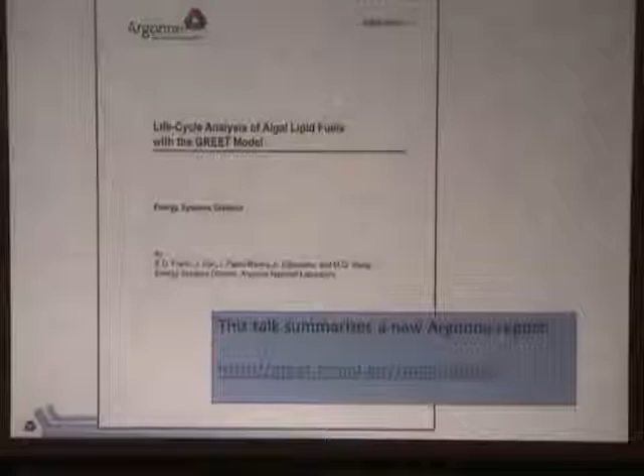I'm going to be summarizing a report that we put out a couple of weeks ago. So if you're interested in more details, you can download it from that address, or you could just Google for GREET publications, and that'll get you to the right area, and you can locate it there.

So let me start with motivation and background and approach. So there are various kinds of algae, macroalgae, seaweed, and microalgae, which are typically unicellular. You can find them in fresh water or salt water. There are many different kinds. Microalgae are nice in terms of growing biomass because their metabolism is focused on growth. There's no woody structure to them, no support structures that they need. And they grow in several different modes.

And the question is whether or not we can carry that over for producing biomass, with the idea being it would complement other kinds of crops, and it has the advantage of potentially having large productivities per unit of area. The fact that it's been grown before for nutraceuticals is somewhat encouraging. On the other hand, the value of nutraceuticals is so high compared to an energy crop that really you need new methods of cultivation. If you're producing something with such a small margin compared to, say, astaxanthin or one of the other nutrients, you have a much larger economic and technical challenge.

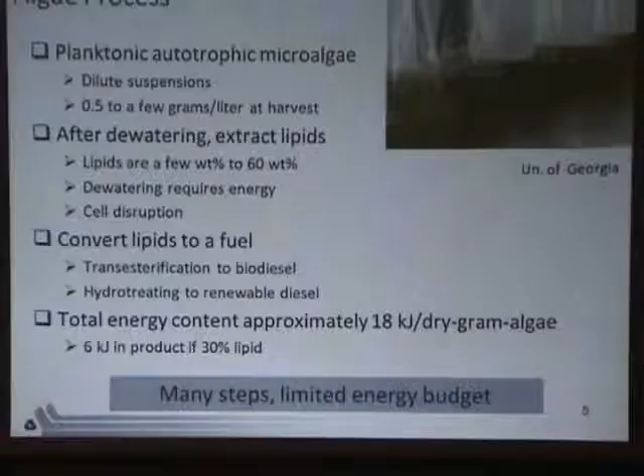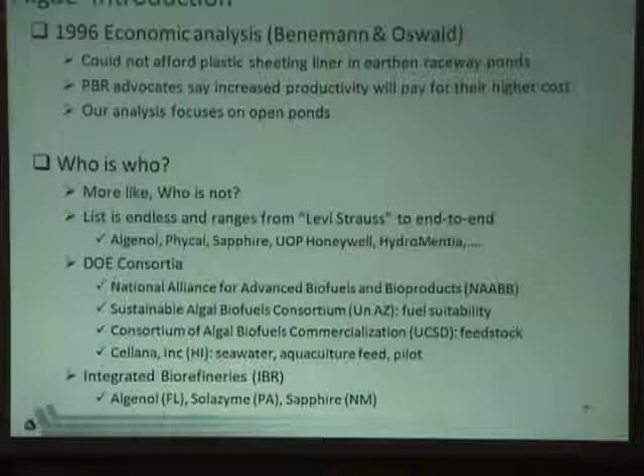So there have been some techno-economic analyses done in the past. Benemann and Oswald, for example, did a study in '96, and they concluded that even for the open pond case, you can't even afford to put the plastic liner in. You have to have the clay soil, or else it destroys the economics of the process. So you have two approaches, really. In one approach, the open pond approach, your strategy is keep costs as low as you can. In the PBR case, the strategy is we're going to make up for our extra cost by increasing productivity and by improving the reliability of the culture because it's a closed system.

I'm going to focus on open ponds in this analysis, partly because of the economic reason, partly because it's easier to find a consistent set of data describing the process for the open pond. So I'll be focusing on open ponds in this.

So who are the players right now in doing algae? Who's who? But the question may be who's not. Everybody's getting involved in this. And the list of people involved range from sort of the Levi Strauss companies whose business model is to sell equipment to the other businesses, most of whom will go out of business, and other companies, like let's say Sapphire, who are doing the entire process end to end. So you find all sorts of people involved, and you also find government involvement, projects funded by DOE.

NAABB is probably the largest one amongst the current DOE consortia, and then there are several others that are looking at a few particular focused issues like suitability, feedstocks, and so forth. And then there are a few integrated biorefinery projects with a few companies that have been sponsored to look at scaling up.

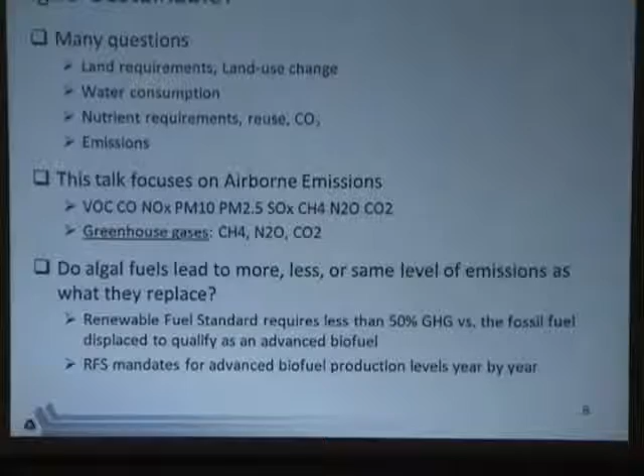So the question is, is it a sustainable approach? If we made this work, would it be a good thing? And there are many issues to consider. Land requirements, land use change associated with this, water consumption, nutrient requirements, where would you get the CO2, various kinds of emissions, eutrophication potential, and so forth. What I'm going to focus on today is talking about airborne emissions. In particular, I'm going to focus on greenhouse gas emissions, so emission of methane, nitrous oxide, and CO2. And the question is, do algal fuels lead to more or less emissions compared to the fuels that they replace? That's what we want to answer.

Ultimately, one of the things driving the process is the Renewable Fuel Standard, which defines an advanced biofuel in terms of its reduction in greenhouse gas emission relative to the fuel being replaced. To qualify, in this case, you would need to have a 50% reduction.

So there are various sources of emissions that you can consider. You can consider the direct emissions that occur during your process itself if you burn, let's say, natural gas in a boiler. There are also emissions upstream, so energy that you use to obtain feedstocks or to produce chemicals. In this case, let's say nutrients such as ammonia, urea, triple superphosphate. Energy used to transport materials. And then there are downstream emissions. For example, when I burn the fuel in an engine, and there are many different fuels that you might produce, different efficiencies for using them.

Life cycle analysis is one approach to answering this question of have we produced something sustainable, at least with regard to GHG emissions. And the approach then is to consider all these various emissions I just described within some systems boundary that maintains a fair basis of comparison between the two scenarios that you want to compare.

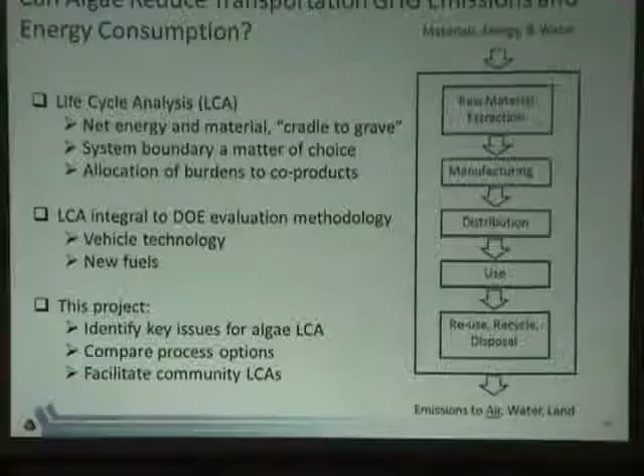And there are different ways to do it. And according to the way you choose, you'll get a different answer. And it's not necessarily right versus wrong. It's more of an issue of systematic uncertainty in the approach. Now, life cycle analysis has been integral to DOE's approach to developing new technologies and new fuels. And I'll mention on another slide how that ties in.

But in this project, what we wanted to do is we wanted to achieve these three things. We wanted to identify key issues affecting algae life cycle analysis. It's very early in the development stage for algae, so we want to understand what the key variables are. We want to compare the important process options. So in other words, exercise those key issues that we find and see how much the changes are. And we wanted to facilitate community life cycle analyses.

And what I'm referring to here is these systematic uncertainties I'm talking about with regard to system boundary and allocation methods. It makes it very challenging to compare what's in the literature right now. As people look at the different options for doing algae, you see a difference, but you don't know if it's actually fundamental to the process or it's just because of a difference in the way that they approached their analysis. And we want to find a way to facilitate making those comparisons.

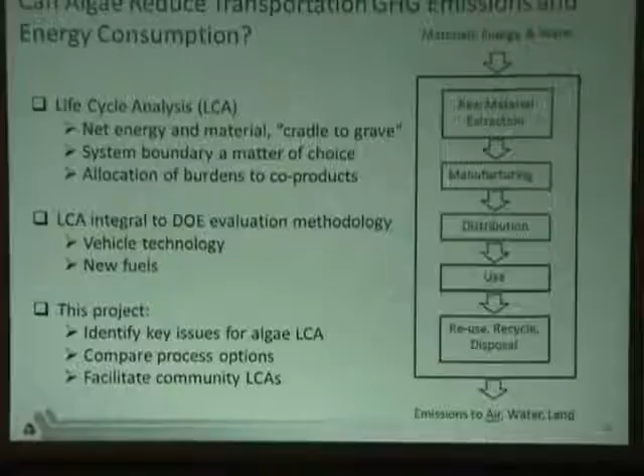So let me give a quick overview of the LCA work that's been done so far. There's been an explosion in the literature, so this is probably only a half to a third of it. But I wanted to highlight sort of the key ideas that have come up to set the context for the choices that we've made in our analysis.

So Kadam looked at a coal power plant that was co-fired with algae. And the algae was grown on CO2 from that coal power plant's emissions. And one of the conclusions that that study reached was that GHG reductions were possible, but if you did CO2 capture with monoethanolamine at the power plant, the steam required for regeneration then disturbs the energy balance sufficiently that you reduce greatly the benefits that you have. So that study led to the direction of let's just look at flue gas if that's going to be your CO2 source, and let's put aside looking at CO2 capture.

Campbell, though, then looked into the potential for doing this in Australia, and they found that 7 of the 9 power plants that were good candidates for constructing this didn't have sufficient land nearby to absorb the CO2 being produced. So they had to consider transport of the CO2, the flue gas, over further distances, and discovered that if you pressurize the flue gas, you use 30% of the energy in the algae. And this goes back to that energy budget at the beginning. So this leads us to the point of saying, well, we're going to look at low pressure transfer.

Lardon considered open ponds and doing hexane extraction, but didn't really go into detail in treating the residues that were left over. So you pull the lipids out, you still have a bunch of mass left. And he didn't go into detail of what happened there, but concluded that you have to avoid drying. If you simply dry, it takes too much of the energy to get dry enough before you go into a sort of dry process that you would use similar to soy.

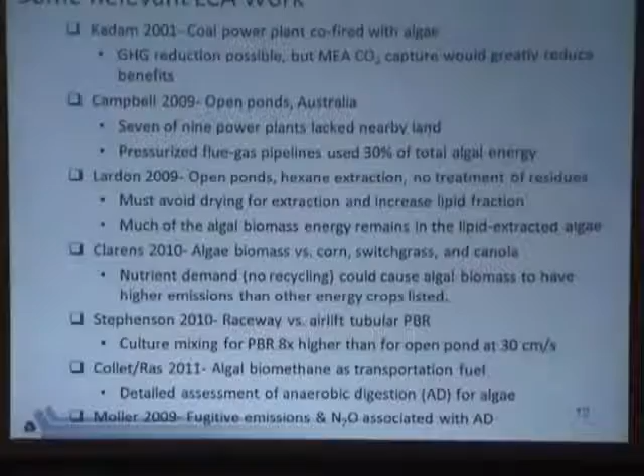Stephenson looked at raceway versus airlift tubular photobioreactors and pointed out the importance of considering the mixing energy just to maintain the culture, and found that the PBRs were 8-fold higher. Now, Stephenson's study was at 30 centimeters per second for mixing, and that's actually pretty high. If you look at some older studies, you don't need to be that high. It depends on the species that you look at, but the key thing is that the power consumption goes like the cube of the velocity. So that's a very sensitive parameter.

Collet and Ras looked at algal biomethane itself as a transportation fuel, so not a liquid fuel, just biomethane. They went into some detail with regard to the anaerobic digestion of algae, and we're going to carry some of that into this study. And Moller looked not in terms of algae, but was considering various emissions related to biogas production and identified fugitive emissions and N2O emissions associated with AD. And we'll talk more about that later. Our work's going to try to carry those into the context of making liquid fuels from algae.

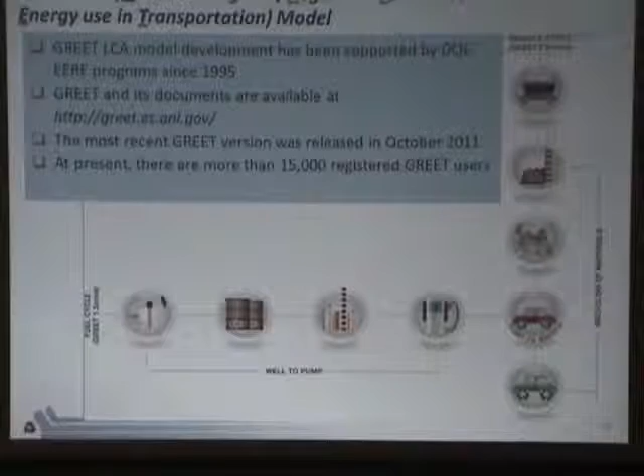So let me talk about GREET. Personally, I can never remember what GREET stands for. Right? It stands for Greenhouse Gases, Regulated Emissions, and Energy Use in Transportation. It's a life cycle analysis model developed and supported by DOE since about 1995. It's freely available. Michael's vision has always been to keep the data provenance clear and allow you to see all the data that's present so that we can get feedback on it and people can understand what goes into the analysis. We have a new version that was just released a few weeks ago, and that new version has been expanded to include algae. There are about 15,000 different users for GREET.

You'll find there are two basic chains in GREET. One we refer to as the fuel cycle. And in this portion, the system boundary includes all the activities related to fuel production, combustion, and use. And the second is the vehicle cycle, which relates to the materials involved in constructing a car and then recycling and return. So this is an example system boundary. Our system boundary for today is purely in the fuel cycle.

So with regard to life cycle analysis, GREET focuses on gaseous emissions and energy consumption. For energy use, both fossil and renewable energy are considered. For fossil, you can see how it breaks down in terms of petroleum, natural gas, and coal. It considers renewable energy, that is energy in the biomass, as well as other renewable energy sources. And for greenhouse gases, it tallies production of CO2, methane, and nitrous oxide, and then combines them by their global warming potentials to get an overall CO2 equivalent.

Various criteria pollutants are also tallied. This isn't going to be so important for the algae at this point. Although we're computing them, we haven't gone through the detailed process yet, as we have with the GHGs.

So GREET considers many different feedstocks for producing fuels, various fossil fuels, various kinds of renewable fuels, and looks at the production of many different kinds of fuels. And so all of these have been available for doing life cycle analysis. And this context would allow us, if we add algae, like we have down here, to then be able to compare the results with many other transportation fuels produced from many feedstocks and compare them on a much more uniform basis systematically. So that's our thinking in going into this project.

And so our approach has been the following. I mentioned the challenges for algae life cycle analysis. The commercial pathways that I sketched before, they're not very well defined. It's very early right now. There are many scenarios to consider. And that partly means or implies that you need many analysts looking at this in order to cover the analysis space. But it's difficult to compare them right now.

And there's a lack of validated data. Much of it's proprietary, held close to your chest. And as I mentioned, the published LCAs differ methodologically. So it's different. It's hard to compare them. So by working within the context of GREET, we hope to address several of those.

Now, we produced an additional helper tool called APD, or Algae Process Description. It's not a process model, but it's an inventory of various unit operations with a few parameters for each one that allow you to rapidly assemble a pathway for analysis. So we're looking for this as a means to facilitate collecting process information from people and then make it easier for them to swap out one piece for another to see the effect of putting in their particular piece or changing particular aspects of the model.

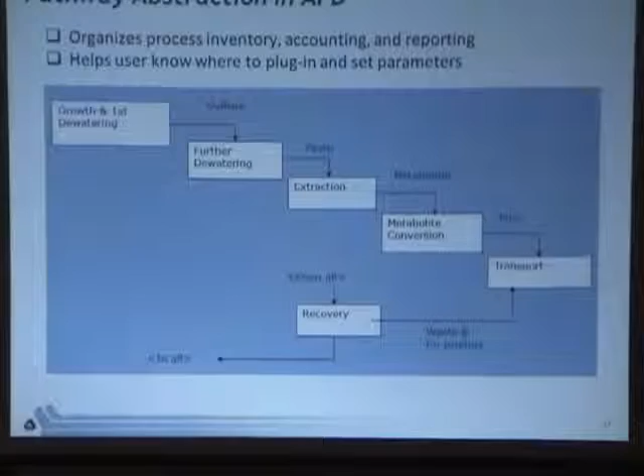So in APD, what we've done is we've abstracted the process to be several steps. The first is growth and first-level dewatering, followed by the secondary dewatering. These two are grouped together because almost all of the water removal occurs within those two. By the time you get down to the sort of secondary dewatering, you've accomplished about 95% or more of your water removal. So we've gathered these two together.

This is followed by extraction and then conversion of metabolites to your fuel. Transport refers to transport of intermediates, not using the fuel. That's different. And then various recovery processes for recovering energy from the residues or recovering nutrients.

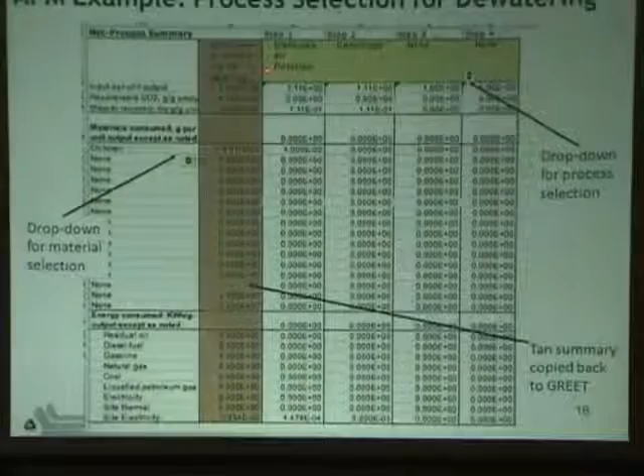An example of what APD looks like, sorry for the typo, there are a number of drop-downs that you can use to select the various unit operations you want to put into your process. So in this case, I'm just showing the configuration box for doing the secondary dewatering, and we chose to use dissolved air flotation followed by a centrifuge. And for each process, you list any materials that are consumed. Each of these things that says none are drop-downs that you can use for putting other materials in. In this case, there's a coagulant, chitosan.

And then you list process fuels that are directly consumed in your process. You explain the relationships between input to the output being produced by that stage. So here we're talking about how much dewatered algae is produced for each unit of input algae. If there's produced CO2, how much is being produced so we can recover it in the process. And then how much mass might flow to recovery.

So if you had additional processes that you wanted to contribute, this would be the format of what you would be contributing. We don't need to open any boxes, and I hope that helps get around some worries that people might have with regard to IP and help make it easier for people to share some of their data.

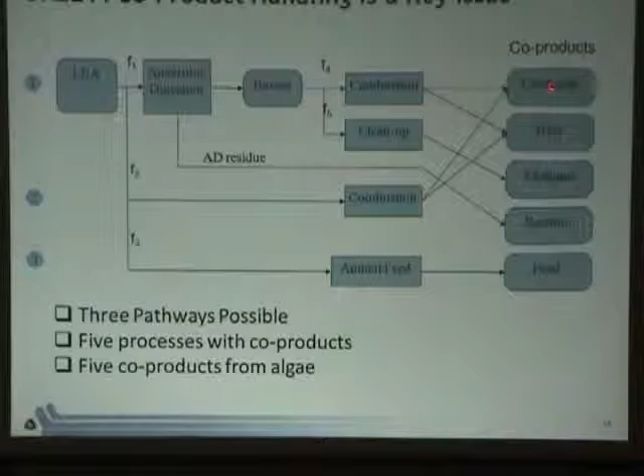Back on the GREET side, that's where you configure the life cycle analysis proper. So one of the key issues there is handling of co-products, and we handle several so far. One is to take the lipid-extracted algae through anaerobic digestion to produce biogas, from which, by combustion, you can produce electricity and heat that might be exported as a co-product or reused in the process. You might do further cleanup to produce biomethane that could be exported.

You might consider residues that could be used as soil treatment, or you might consider its use as feed. The analysis I'm going to be presenting today focuses on this path across here, producing electricity and heat for reuse in the process or export of electricity as a co-product.

Okay, so now let's talk a little bit about what's being included in the system boundary within our analysis. So we're including everything upstream for our production of input materials, in particular fertilizer and CO2 supply, through its combustion and fuels, and then the production of the algal residue after digestion and its transport for use in soil, and emissions of N2O from the soil.

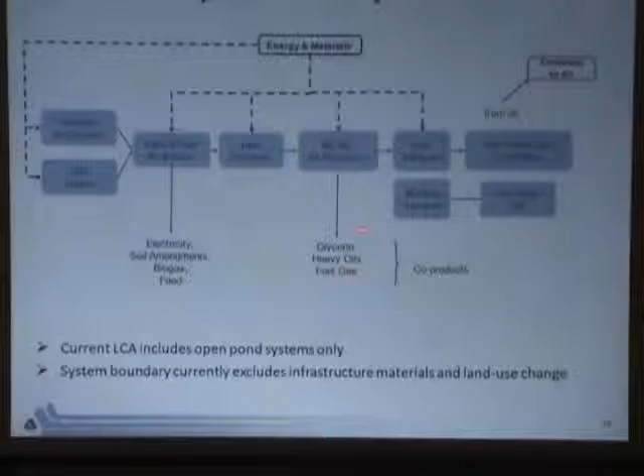So the processes, as you move across, are the algae and lipid production, which has various co-products like electricity. I just mentioned the soil amendment. There's then transport of lipid to where fuel production happens, either biodiesel, renewable diesel, where there can be co-products like glycerin, heavy oils, and fuel gas. And then there's transportation to station for use.

So there's a supply of energy and materials to each of these steps, emissions from all of them to air, which then have to be accounted for. So we're focusing on open ponds, and we're excluding infrastructure materials, for example, any cement that would be used in construction of the facility or plastic being used. And we're not considering land use change at the present.

Our reference pathway is low sulfur diesel, and I just want to make the point that the scope of the pathway is comparable. We're looking at all processes upstream from procurement of all the essential materials needed to produce the fuel through its eventual combustion. So the comparison between the two is, to the best of our ability, apples to apples in terms of scope.

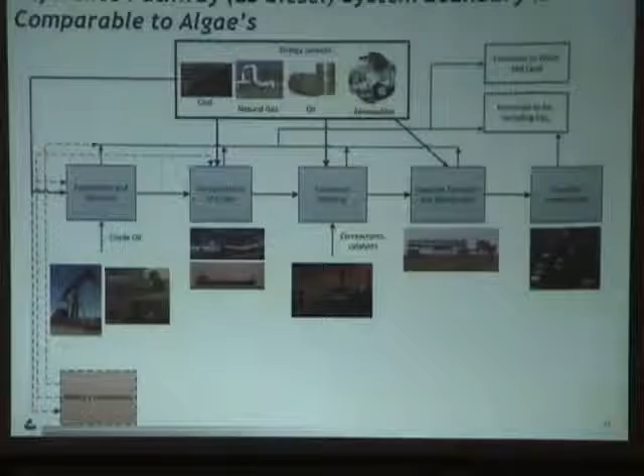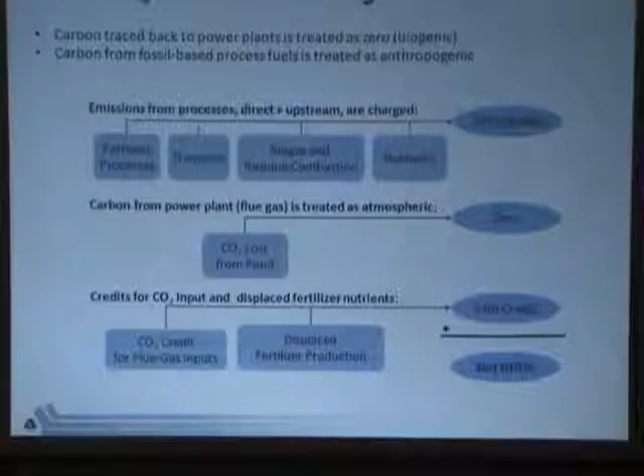What we do is what we refer to as back-end accounting. Let me back up one step. There's an important point to make. In the process here, although all the C in the fuel originated from fossil fuel, the philosophy behind the analysis, and this is common amongst all the algal analyses, is that with or without the production of fuel, the power plant is going to operate. So the CO2 would have been emitted anyways.

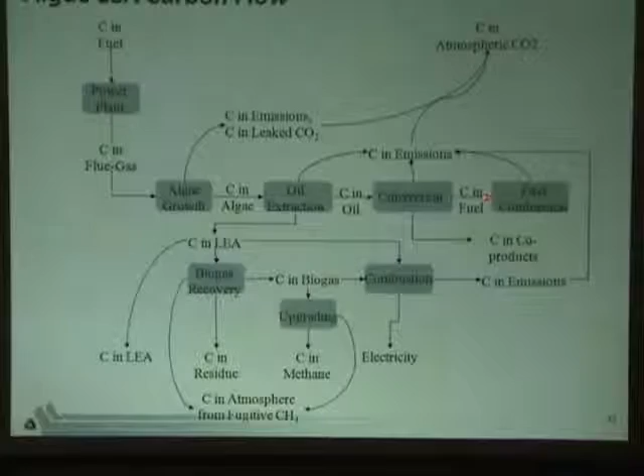And for that reason, the CO2 is being treated, in a sense, as biogenic. It's not being given a carbon debit. Right? Because were we not to make the algal fuel, it'd end up in the atmosphere anyways. And so taking it from the power plant is, in a sense, being opportunistic and grabbing atmospheric CO2 before it's been dispersed and become too dilute for us to actually use.

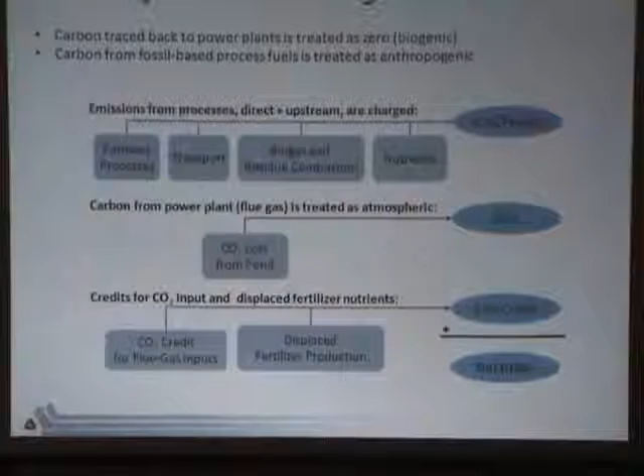So in the accounting, all the carbon that traces back to the power plant is treated as if it was biogenic, and all others are anthropogenic. So we'll look at all of the emissions from our processes and incur a penalty for them. If I have any CH4 emission during biogas combustion, it will be accounted for according to its global warming potential. And then in the end, we take a credit according to the flue gas CO2 that we had upstream. In that way, we account for the change in global warming potential for some of the carbon involved in the process.

In our process, we grow algae and produce oil. The remnants go to an anaerobic digester, which is used to produce electricity and heat, which can then be used to meet some of the demand required for the process. In our analysis, this reduces our imported electricity and natural gas demand. So our approach is to only count our energy consumption here.

In some analyses, you'll see they consume all of this according to their demand and then subtract a credit for the emissions equivalent that they displaced. So rather than taking this as a displacement on the emission side, we just look at our net consumption on site. We feel it reduces the uncertainties in the analysis by doing it that way.

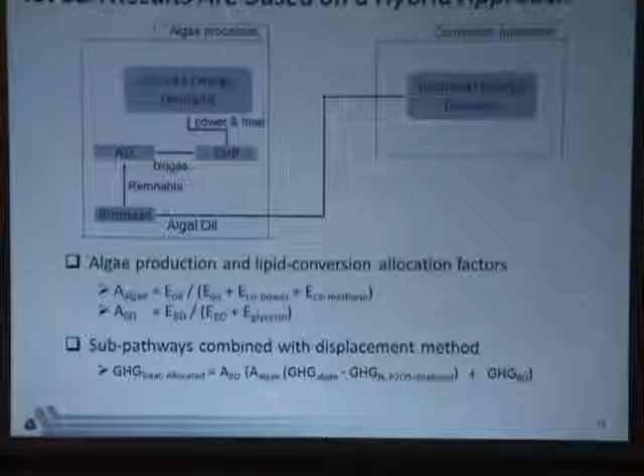All right, so these are the on-site processes. The algal oil then goes on to a conversion process. And I mentioned earlier we have to address this accounting problem of how do we allocate or distribute the charges for the emissions amongst the various products being made. And we use a hybrid approach.

So what we do is I call this algae, maybe I should have called it lipid because this goes all the way through the lipid delivery to the conversion step. We look at the various things that can be made: oil, co-produced power, co-produced methane. And also in this step, we have this residue that is displacing agricultural fertilizer.

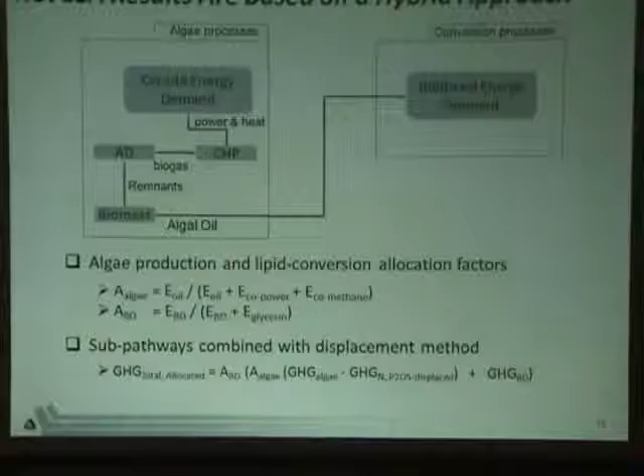So what we do is we take the total emissions for the production of the lipids and we take a displacement credit for the fertilizer, because its natural basis for assessment is the greenhouse gas emissions in its production. Treating it on an energy basis or treating it on a mass basis isn't really the germane variable for that particular thing. We then allocate those emissions to the lipid portion by an energy allocation method.

So in our case, we aren't producing methane. It's just the distribution between the oil, the lipids being produced, and co-power. These steps are fed into the biodiesel production step. And there again, we make an allocation to the biodiesel according to an energy allocation between the biodiesel and glycerin. So the emissions at that step are then allocated, and then this is treated as an input that again is allocated by that same fraction.

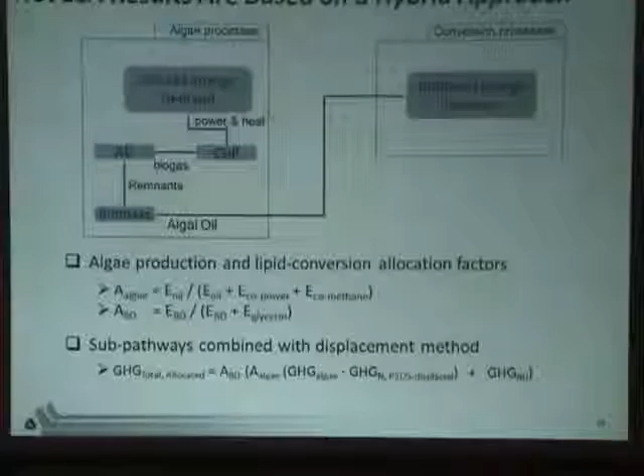Now, why do we treat glycerin on an energy basis? Again, you might treat that on a displacement basis because it's a chemical, right? Our expectation, though, is that at the scale that you would be looking at for producing transportation fuels, the market for glycerin will be more than saturated. And so more than likely it will end up being used as a process fuel on site or for some other purpose where an energy basis would be a better treatment. So these aren't the only ways to go about it, but it's the way that we went about it in doing the allocation in our particular analysis.

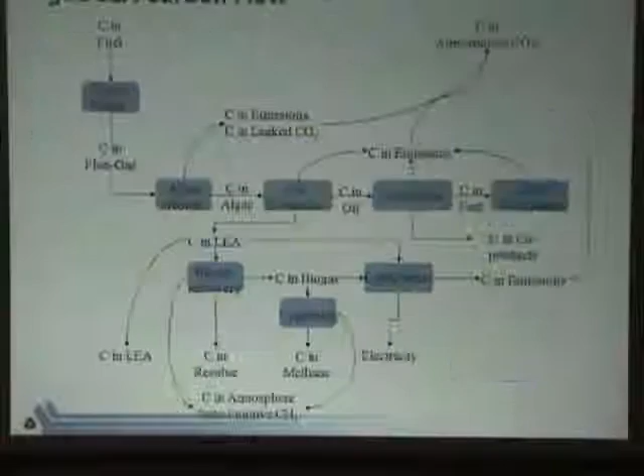Okay, so that's the introduction, the motivation. So let me describe in more detail the pathway that we're looking at. Let me back up here quickly. In this broad picture, I'm going to expand this one box. So we're going to look at growth in an open pond. The first level dewatering is done by bioflocculation.

And this is a process by which the algae have a negative surface charge and would prefer to just stay in suspension. But there is some belief that one might be able to adjust growth conditions at an appropriate time to allow them to flock and then settle out. Pretty much any other approach is suspected to be uneconomical. So although this process isn't demonstrated, it's commonly assumed. So it's one of the weak points in these sorts of analyses.

So we use this as our first level of dewatering, followed by dissolved air flotation, a common process for wastewater treatment, followed by a centrifuge. So we're looking at processes that increasingly use more energy for their process, but are handling less and less water. We go 0.5 gram per liter to 10 grams per liter, and then to 200, and that's actually in 2 steps.

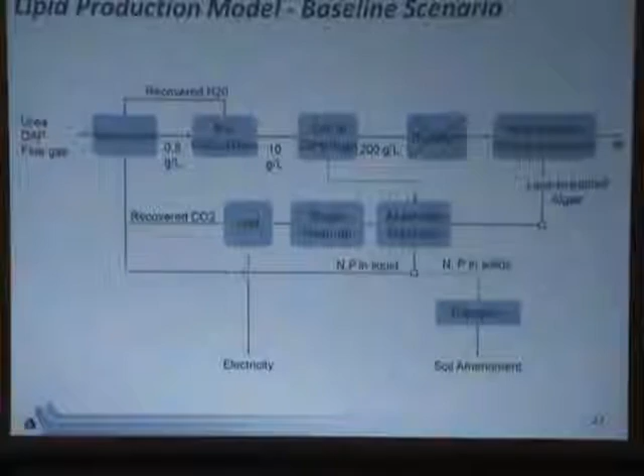In theory, there is a transport step to take the biomass over to where you're going to do extraction. In our case, we're considering a wet process, so transportation wouldn't be feasible. So we don't include a transportation step. Instead, it goes to a pressure homogenizer and then a wet hexane extraction process. The residues then go to a digester to make biogas. The biogas is combusted to make electricity.

The CO2 is recovered to the pond. Electricity can be brought back to the process or exported. And the nitrogen and phosphorus from the digester, the liquid portions return to the pond. The solids are then transported for use as a soil amendment. And I'll be the first to say that these steps are not demonstrated. Well, maybe that one. It's not demonstrated that the algae will actually grow successfully in that context.

Okay, so the energy numbers, the data provenance for what we're using: there are several sources of estimates for the mixing power with paddle wheel. It depends on the mixing velocity. One of the earlier studies was by Weissman. He studied numerous species at different mixing speeds. Different species have different size, and so they need different mixing speeds to maintain the culture in suspension.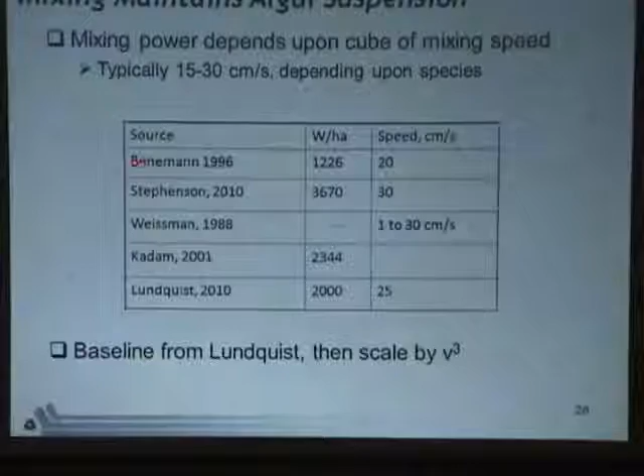Benemann used this spread of values to estimate a speed typical for what would be an expected crop. These inputs were part of Lundquist's study in 2010, which went into a little bit more detail and considered the potential for reducing circulation speed at night and was able to save a little bit of energy. But some other bits of realism also brought the number up. So this is the number that we end up using, and in various scenarios where we change the mixing speed, we scale that number by V cubed.

For pumping power, you need to move water in various ways during the process. Water has to move from the pond to settling and then move back again. Water evaporates from the pond, and you have to pump in water to make up for the evaporation. So to estimate the pumping cost, we used a simulation package that's used for wastewater treatment based upon some work from Harris in 1982. So these are sort of rules of thumb that are commonly used.

And we used the portion for intermediate water, which is water that can be treated like water. In other words, not thick, mucky stuff that needs its special pumps. And in that case, the rule of thumb is 15 feet total head for transfer on site, with a rule of thumb for energy consumption. And we treated this as good practice and used that for our energy estimates.

There's a good chance that this might be an overestimate because a waste treatment plant is a more compact facility than a large distributed algal structure. You may find that there's some optimization there, but we treated this as good practice and used this for our energy estimate for pumping.

Anaerobic digestion. We surveyed the literature to see what was available in terms of data for digestion. And there are a few studies. However, they're pretty much all looking at intact algae, whereas what we would be looking at would be the residue after lipid extraction, and that changes the carbon-nitrogen balance in what you would be digesting, greatly increasing the nitrogen portion. So the only study we found with lipid-extracted algae was this small one. I'm not sure of how the author's name is pronounced.

One of the results was that for them to get good methane yields, the substrate concentration in their digester was about 10-fold less than what would be typical in an existing production digester. So rather than 5%, it was more like 0.5% what they found they needed in order to have decent digestion.

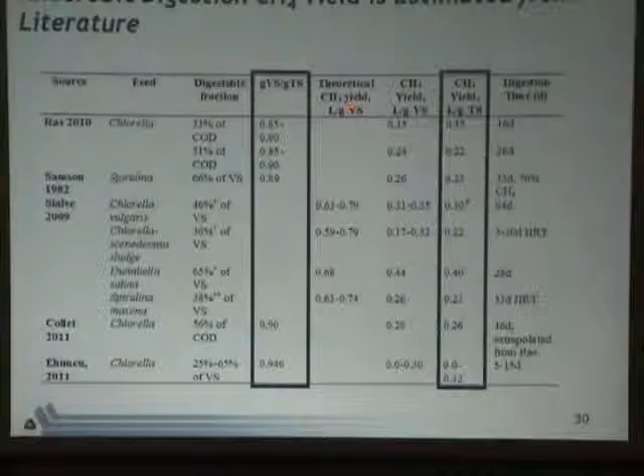The other studies had a spread of values. If you look at the yield of methane on a volatile solids basis, that was pretty broad. What we did was we expressed this on a total solids basis because that facilitated our computations of mass flow through the system, and everybody was about the same on the ash content. And so this spread of values, the middle of the distribution is about 0.3, and that's what we ended up using to represent our biogas production.

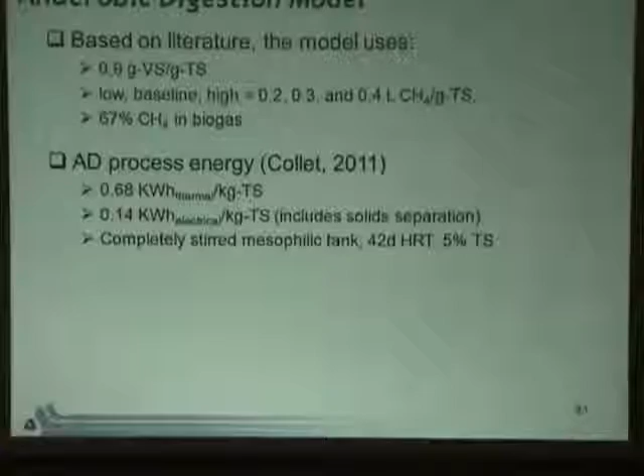So as I mentioned, there's this uniform, fairly constant result of the ash content. We use the center here for our production of methane, and to then calculate the biogas production, we use 67% methane content in the biogas. We then use Collet's assessment for thermal and electrical energy demand for running the digester. And his consideration was for a completely stirred mesophilic tank.

His residence time was quite long, actually, compared to what would be a real plant. Usually this number is more like 20 days. So his energy consumption here is probably higher than what one would need. On the other hand, the digestion that we saw in the other slide is poor. So perhaps that is a good estimate.

We looked for information concerning direct emissions of methane from the anaerobic digestion process, and we found two studies. One by Flesch. This is a study in Canada of a fairly modern advanced digester. They found 3% total emissions, most of which occurred during loading of biomass into the digester, during periods of maintenance when they had to open the digester, and during flaring to handle overpressures. Now, this value fell to just about 2% when they redesigned the hopper to keep it at negative pressure.

Liebetrau looked at 10 different biogas facilities in Germany and found several sources within the plant. These two approaches use completely different methods for measurement. Liebetrau's method was to identify potential sources of leaks within the digester, and then build a hood over that particular part, and then assay the collected gas.

And he found several sources, ranging from 0.1 to almost 2%, and noted the important point that the digestate that's taken away from the process still contains substantial potential for further production of methane. And so the method by which you store the digestate, since its application to soil is seasonal, is an important consideration. Right? If you don't put the expense into covering and recovering those, then your methane emissions could be substantially higher. So based on these, we estimated maybe 2% for fugitive emissions.

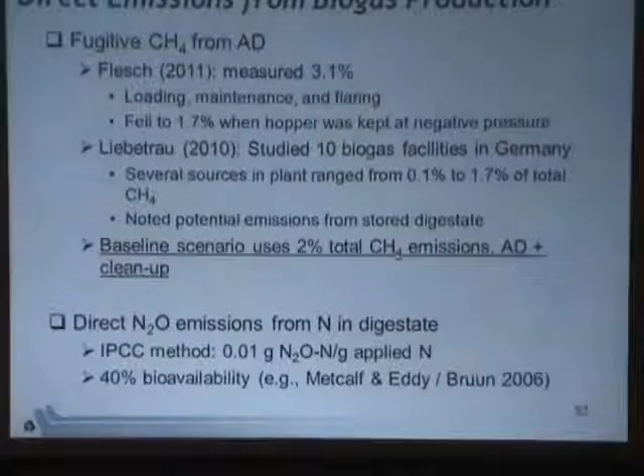So what happens here is because the bioavailability determines how much fossil or mineral fertilizer you displace, and that's only a fraction of the N, yet all of the N leads to an estimated release of N2O, you end up with a net N2O release relative to the fertilizer that you displace, and we included that in our emissions burden. I would say that this is not cut and dried. There's a lot to discuss here and to understand further. But this seems to be the methodology suggested by IPCC, including a recent review, I think in 2006, based upon a number of publications since their original suggestion.

Combined heat and power, we used the performance of a gas turbine at the 30 megawatt scale, which is consistent with the sort of size facility that we would be considering, and use that electrical efficiency and heat recovery to estimate how much electricity would be recovered to the process.

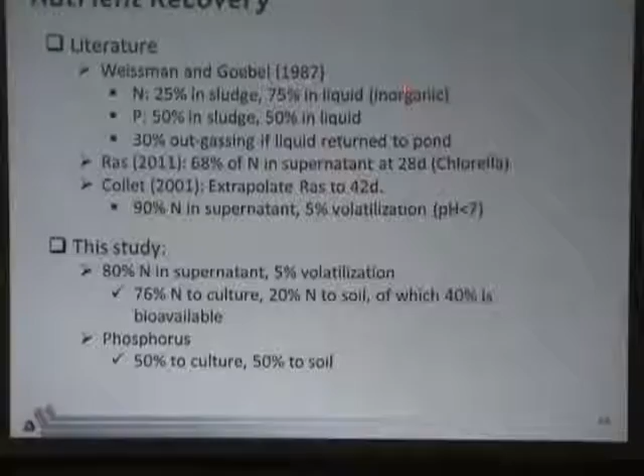Nutrient recovery. Again, this is not a demonstrated capability, returning nutrients from the anaerobic digestion to a pond. The basic idea is that the digester mineralizes nitrogen into the supernatant, and that becomes available for use in the pond. But there's a lot more in that supernatant that could affect the algal growth. Weissman and Goebel estimated that something like 25% of the N remained in the sludge and 75% would remain in the liquid, and the phosphorus would be split evenly. The nitrogen would likely suffer 30% outgassing when returned to the pond.

Now, Ras had some experimental data looking at chlorella and found about 70% of N was in the supernatant at 28 days digestion. Collet, in their study, extrapolated this to 42 days to get to a higher digestion and thought that maybe 90% would be in the supernatant. And if you could keep the pH low, you'd reduce the volatilization. So based on sort of all this hand-waving, having to choose a number, we estimated maybe 80% N in the supernatant and 5% volatilization in return. And phosphorus 50-50 between the two, with both being used at 100%.

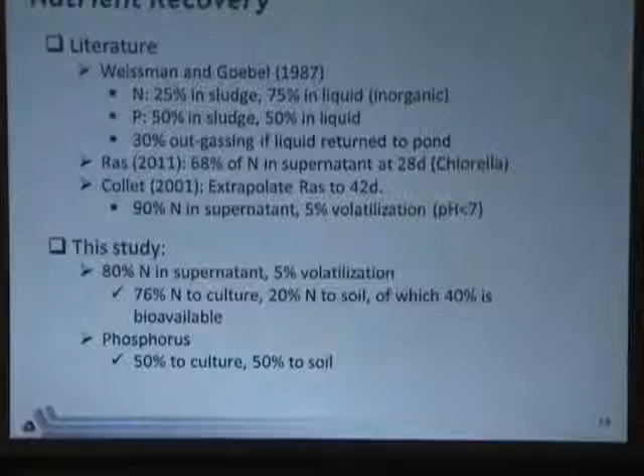Later, I'm going to describe an alternative process than AD for producing biogas. And that alternative process is able to do better than this. So although this data isn't established, I'm going to use those values because this other process sort of sets the bar these guys will have to meet. And so that's another reason for using those. But I think there's a lot of uncertainty here.

To compute our nutrients, we just do a rough mass balance. So based on the stoichiometry of C, N and P in the algae and its flow down to digester solids that then go out to the soil or to liquids returned, we can figure out how much nutrients we need to consume.

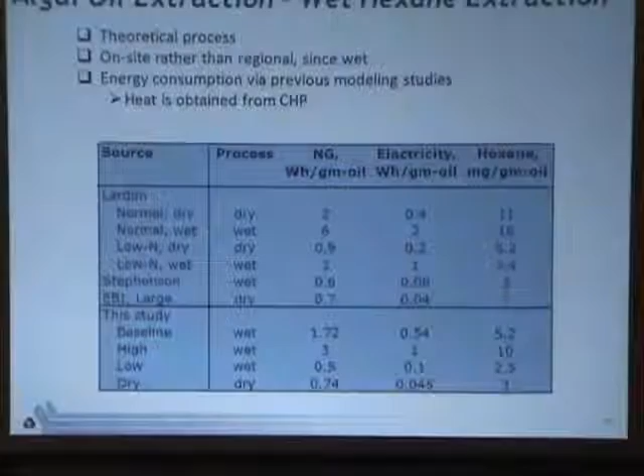For the oil extraction portion, there are some models that people have used of wet and dry processes. Lardon made some based on sort of a volume scaling. Stephenson made a HYSYS simulation, and from them estimated the thermal and electrical power. So we use these to take sort of a representative scale value from these for the baseline case.

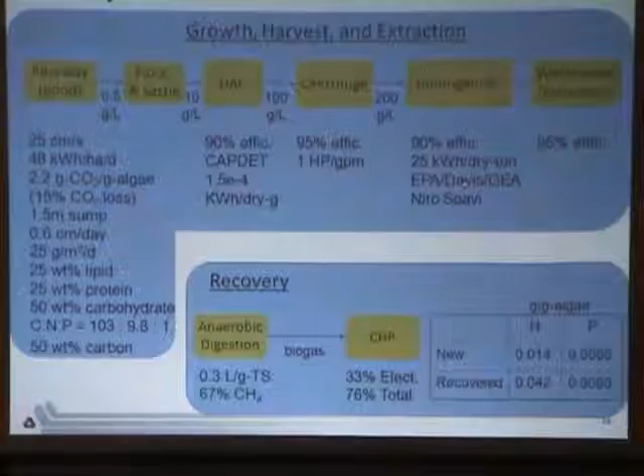So all put back together, what we're looking at is algal growth at 25 grams per square meter per day and 25% lipid, which is fairly conservative. It's aggressive relative to what people have demonstrated, but conservative compared to what people are promising. We then proceed through the various places that I described already, sort of 90% efficiency for retaining algae during dewatering in each of these steps, 90 and 95, 90% efficiency for homogenization. The lost biomass then flows off to the digester.

Okay, so let me move on to results. So it's a lot of information I'm dumping on you. I wanted to give you the context for what went in.

Okay, so for energy balance on site, what we find is that based on that model for anaerobic digestion, which I think has lower methane yield than what other studies have used, we find that we're unable to meet the electrical demand on site with what's produced through CHP. And so we need to import additional electricity, this guy here, to meet process needs.

On the other hand, the waste heat from the combined heat and power is adequate for all of the thermal needs for the anaerobic digester, as well as the thermal needs for the wet hexane extraction. In fact, we have additional heat that we throw away. So there's room for doing additional thermal processes on site if possible, and that would increase our energy recovery. For CO2, about a quarter of the demand can be met from the CO2 recovered from the CHP. The rest then has to be brought in.

Okay, so total energy and petroleum use. In each of these, I'm going to compare the conventional low sulfur diesel with algae biodiesel. Let me start with the petroleum energy use. What you'll see, thought I had another slide in here, which I guess I've left out.

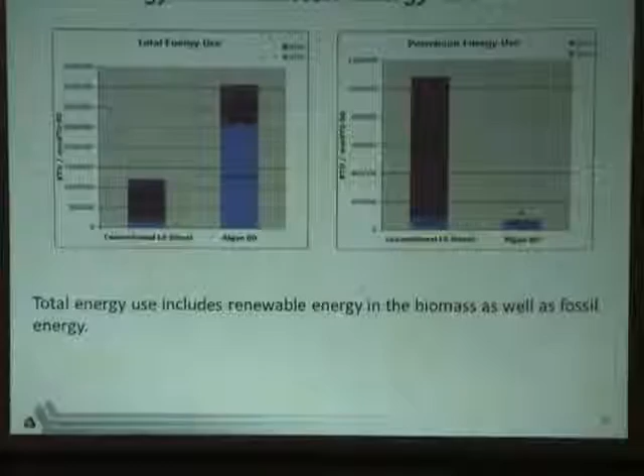For total energy use, it's substantially higher. But this includes energy in renewables, right? So this includes all of the energy that was in our residue that we burned to produce electricity and suffered the thermodynamic loss of maybe 2/3 for the electrical efficiency. So that's why this number is looking particularly big. This is a combination both of that factor plus the energy demand of the process.

In terms of fossil energy use, the process for producing the fuel from algae is roughly twofold higher than the fossil energy consumption for production of the conventional low-sulfur diesel. And we'll break this down in a second to see where that's coming from. But we avoid the fossil energy in the combustion phase, so there's a net savings.

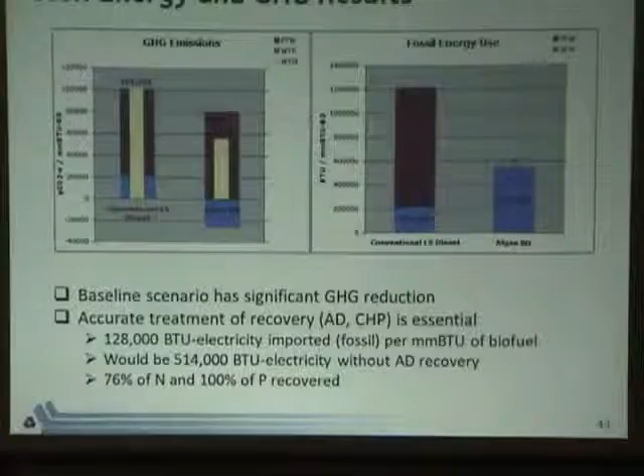For the GHG emissions, there are two components. There's a credit portion, which comes from the production phase, and we'll break that down in a second. And then there is the GHG emissions during combustion, which together combine to produce about 55,000 grams CO2 equivalent. So roughly a factor of 2 compared to the baseline scenario. So there's substantial savings in this baseline case. It depends a great deal upon the accuracy of the energy recovery, as I pointed out, and the reuse of the nitrogen and phosphorus.

So let me break down these other two a little bit so you understand where they come from. So this bar right here I'm going to break down, right? The GHG from the production portion. So that's this guy. So that guy comes from two things. One is emissions during the production phase, which then is offset by this biogenic credit that I showed you earlier on, where we take a credit for the CO2 that came from the power plant.

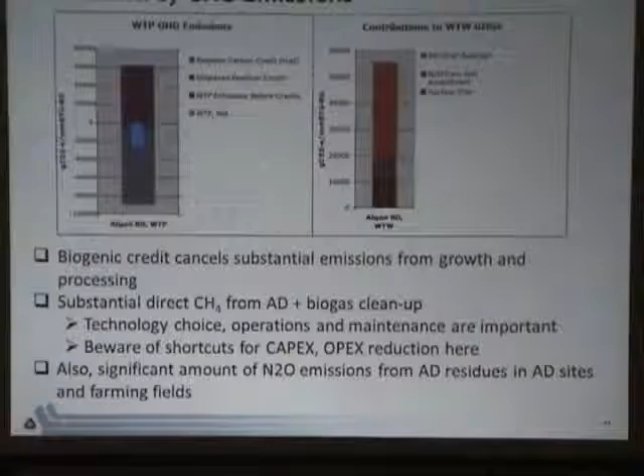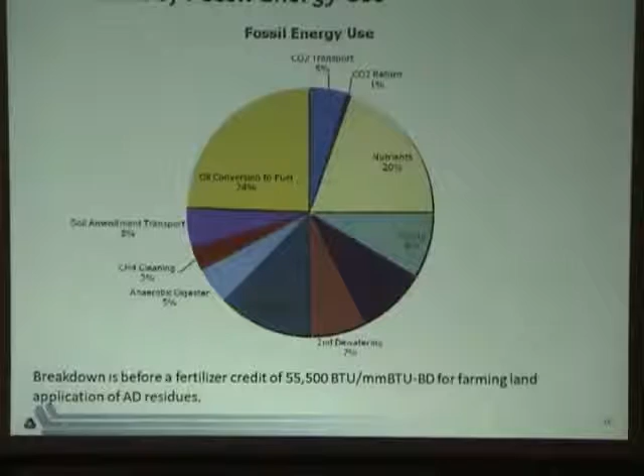So what you would look for in producing a process is either the ability to use some of the thermal energy that we're throwing on the floor when we're done with CHP, or look for ways to reduce electrical consumption in the process that you're using. And a lot of the energy is coming from water movement and water handling in this portion here.

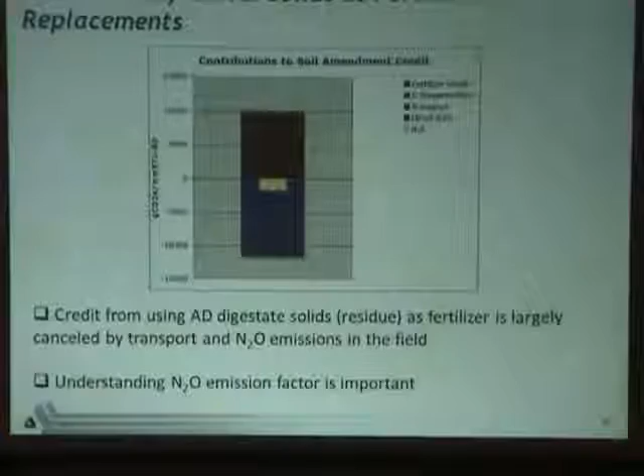If it's a very carbon-poor soil, you might find that you can have an opportunity to accumulate carbon and have a much better effect than what we're showing here. On the other hand, if this were reduced by very much, then you might find that this just goes to zero. So it depends a great deal upon the local soil chemistry and the details of what you're doing.

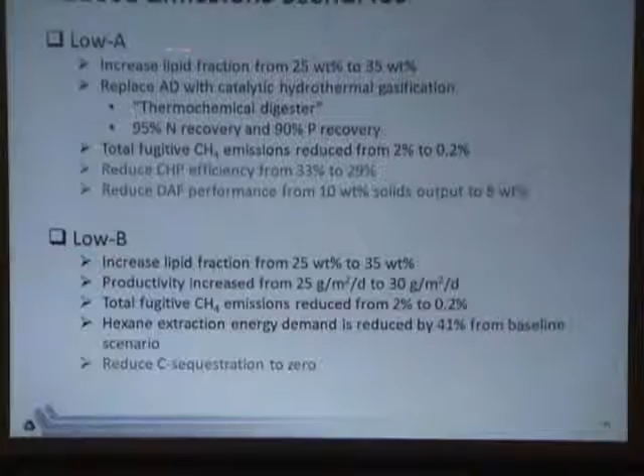We considered two other emission scenarios to compare with our baseline, these reduced emission scenarios. In one of them, we increased the lipid fraction to 35%. We did that for both of them, actually. But in this one, we replaced the anaerobic digester with a catalytic process, catalytic hydrothermal gasification, which is a kind of thermochemical digester. Despite its name, it's not like a thermochemical gasification process that's producing syngas. All the reactions occur in water.

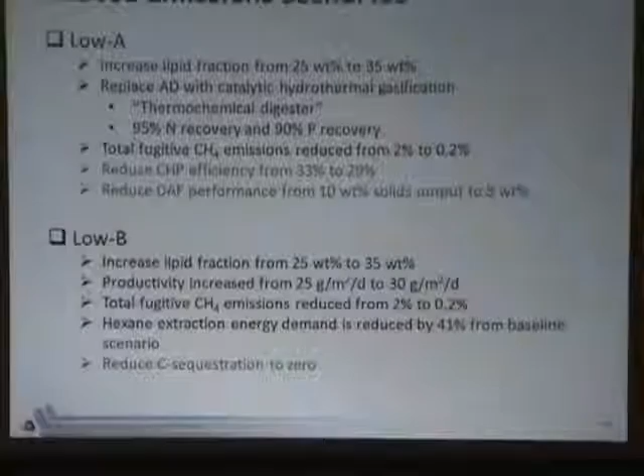It's more like hydrothermal liquefaction in its essence, in which you then bring the soup past a catalyst that does reduction of nitrogen and carbon to produce ammonia and methane. And so you end up with high recoveries of nitrogen and phosphorus. The people developing the process actually report almost complete recovery of N and P, but we backed off of that to 95 and 90 just

to be prudent. The nitrogen is recovered as ammonia in an essentially sterile aqueous phase that comes off. The phosphorus precipitates out upstream in a sort of clay-like, apatite-like material that you can recover with sulfuric acid.

Because this is a very condensed process, small process, more akin to the sorts of processing that you do, for example, in natural gas cleanup, it's quite plausible to think that you'll achieve the sort of fugitive emissions that you see in those sorts of processes. So we reduced the fugitive emissions down to 0.2.

Now, to be on the conservative side, we took these benefits, but then we took a couple of hits. We reduced the CHP efficiency to correspond to saying we don't know the utilization factor. Right? We might be working below its rated limit, which reduces the efficiency. And we reduced the DAF performance from 10% output to 8%, which is, in my opinion, a little bit more

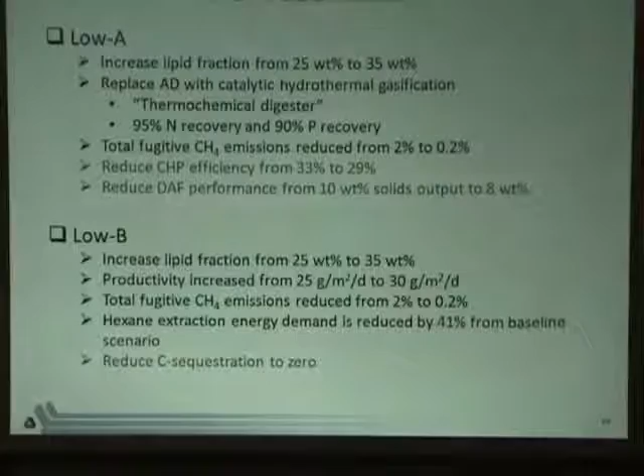plausible. The second scenario worked just by increasing the lipid fraction, increasing the productivity, which we didn't change here, assuming that we were able to get the fugitive emissions down in an anaerobic digestion process. And we took sort of a middle of the road. I showed you that span of values for the energy consumption in the hexane extraction process, and we just took a middle of the road there.

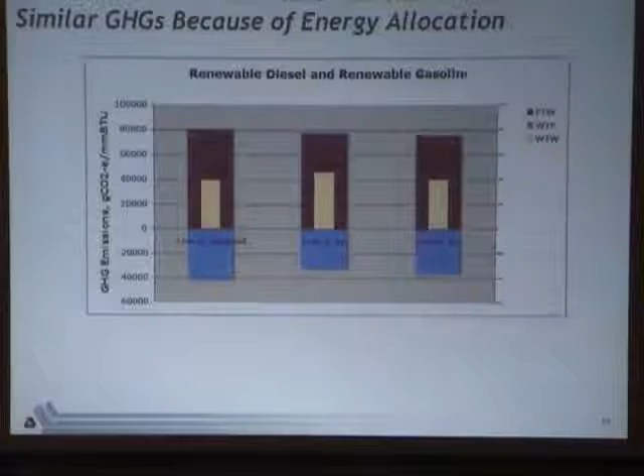We also looked at production of renewable diesel and renewable gasoline rather than biodiesel, partly because these fuels are more easily used in the current fleet than is biodiesel. And you find that the results that you get from these are pretty much the same as you would get from biodiesel. Although for these, think carefully, because there are issues of allocation of the process emissions amongst them because they're co-produced.

Let me say this differently. I mentioned at the beginning there are issues with regard to how you do allocation when you make comparisons. And at the present time, these studies are using different allocation methods than what I used for this study here. So we need to come back and think about how much of an effect that's producing when you make these

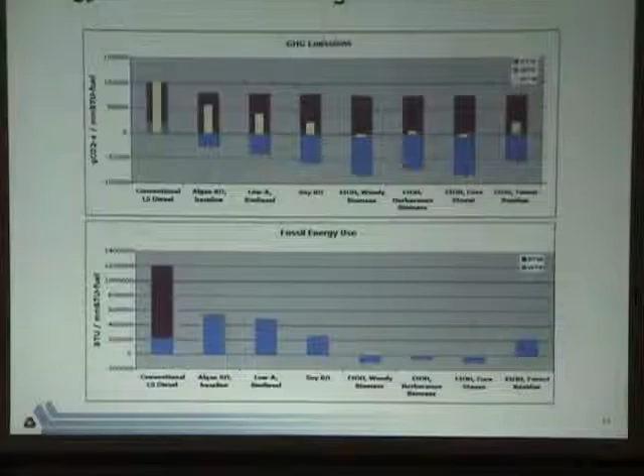comparisons. But in the meantime, as a sort of flavor for what's going on, it seems at this point that algae offers substantial promise in reduction, but has higher emissions than some of these other fuels that we're looking at and is requiring more fossil energy in its input.

So for conclusions, we see the potential in this model for sort of 50 to 60% relative reductions relative to low sulfur. The fossil energy use appears to be higher than the other biofuels, but there are some cautionary notes. One, this is based upon undemonstrated processes and performances. We've done our best to find things that we have energy numbers for, but as you saw, there are many things that we had to sort of read between the lines. And the second, it's based upon treating the flue gas carbon dioxide as if it were atmospheric. Right? Were it not for that, the results would look different.

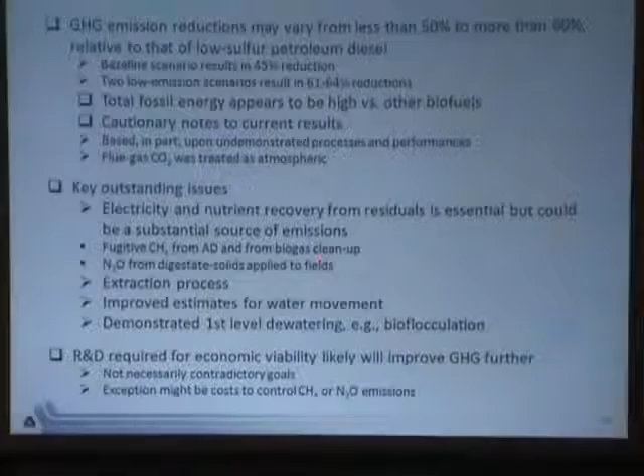The key outstanding issues that we identified: electricity and nutrient recovery is essential. But on the other hand, it could be a substantial source of emissions depending upon how you do it. So it's not something that's just for free. We have to think carefully about fugitive emissions. We have to think carefully about the N2O.

Let me say this one a little bit differently. We know from Clarens and some of the other analyses that the energy consumption from the nitrogen is substantial. We need to recover as much as possible. To the extent that you don't recover the nitrogen, you're not done with your analysis yet. You need to understand the fate of all the nitrogen in your process as it flows downstream, and that hadn't been included in the other analyses yet.

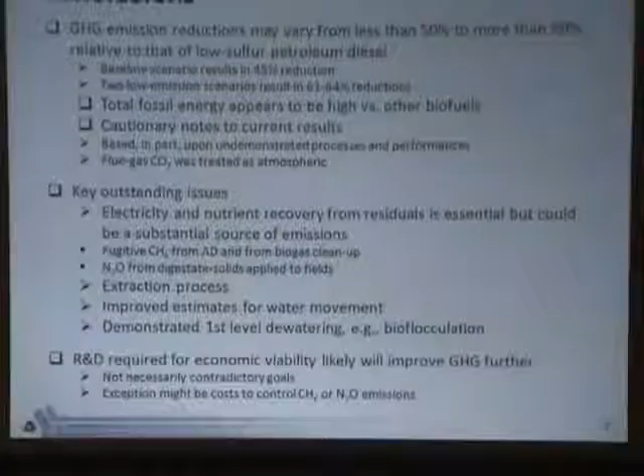The extraction process in particular, we need something that's demonstrated on wet process. We need improved estimates for water movement. And I'd like to see that there's some credible evidence that bioflocculation or something for that first level dewatering is going to work.

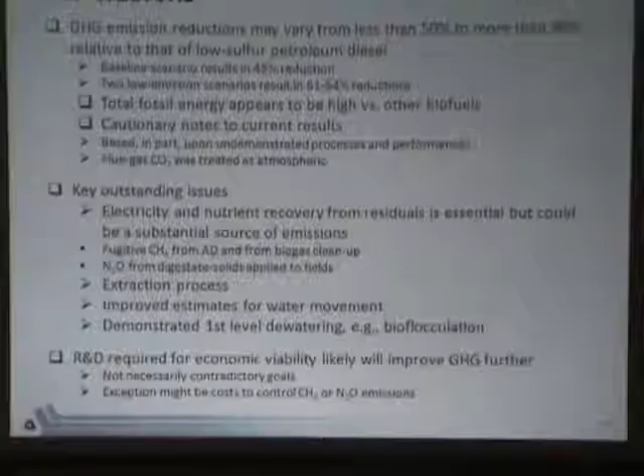The good news is that these sorts of things that we're identifying, the R&D required for economic viability, the two key factors there were lipid content and productivity. And at least for those variables, the GHG requirements and the economic requirements are working in the same direction. They're not at odds with each other, and that's an encouraging thing.

But do be careful. It could be that for control of fugitive methane emissions and nitrous oxide emissions, maybe they go in opposite directions depending upon what you do. So there is a place to sort of keep an eye on things. But at the moment, it appears at least they seem to go in the same direction, be driven in the same way.

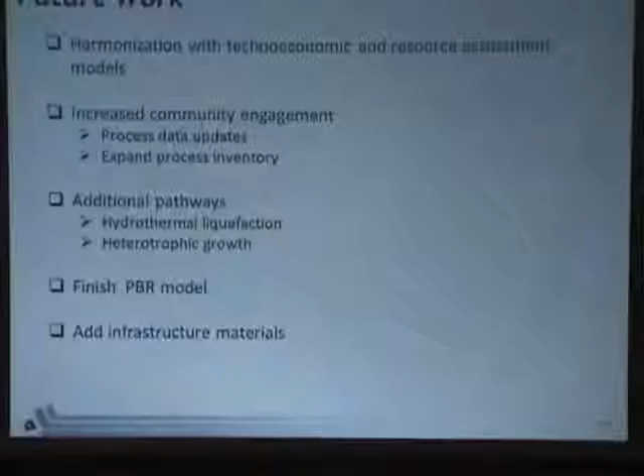Future work in the coming year will be to work on harmonization with techno-economic and resource assessment models so we can get a broader idea of how these various variables interplay. We want to increase our community engagement so we can get better process data, expand the process inventory, and help people do additional analyses so we can compare more algae scenarios, and add new pathways. Hydrothermal liquefaction, heterotrophic growth in particular, are high on our list for ones to include.

We want to finish the photobioreactor model, and we're going to double check the infrastructure materials. I don't think it's a large effect, but we need to calculate it out.

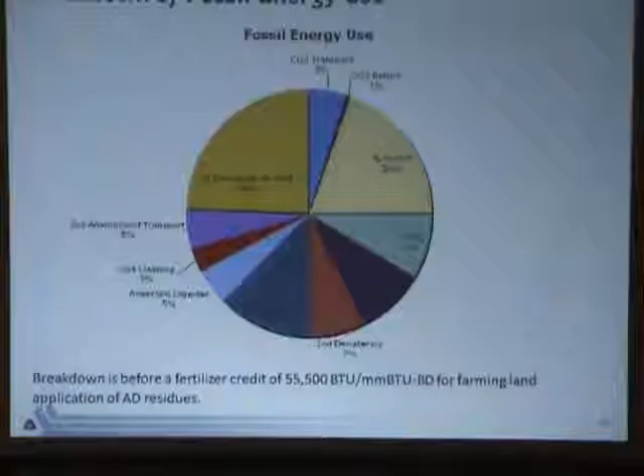I wonder if you could put up your pie chart of the emissions. It's like slide 95 or something, right? So in here, the oil conversion to fuel is just transesterification of the oil. This is transesterification, that's right. So that's a mixture of process heat, consumption of some methanol, methanol recovery. Okay, so that's the biggest component. The second one is nutrients. If the nutrients were supplied from wastewater, could that go to zero?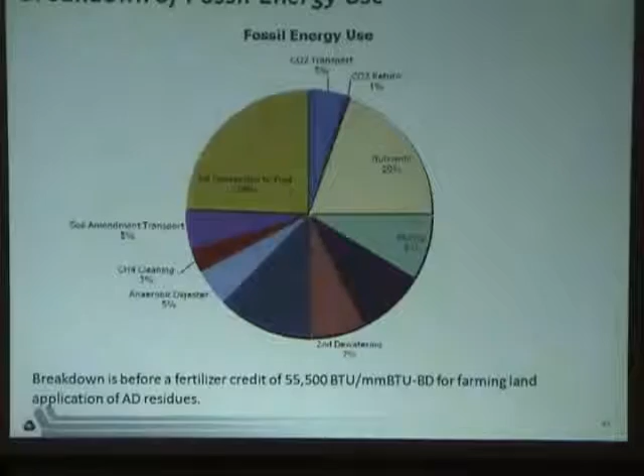There is an assessment of that in a study by Lundquist et al., 2010. Let me give two different answers. The answer is yes, but you will be limiting your ability to scale up according to the availability of wastewater and land nearby the wastewater treatment. And for that reason, in our study, we didn't consider wastewater as a source of nutrients so that we could complement that analysis that had been done already and try to see how much further we might go.

Similarly, our choice of a wet process was to complement their approach of using solar drying and then going into a regional dry extraction process. So you could, but we deliberately chose not to. And if you do, you have to think about the resource potential. So you're just looking for makeup nutrients because you assumed a significant nutrient recycle through anaerobic digestion. And these are makeup, so it's already been subtracted. So I would submit if it's just makeup nutrients, it actually scales quite well. You could still make a lot of oil based on the available wastewater nutrients.

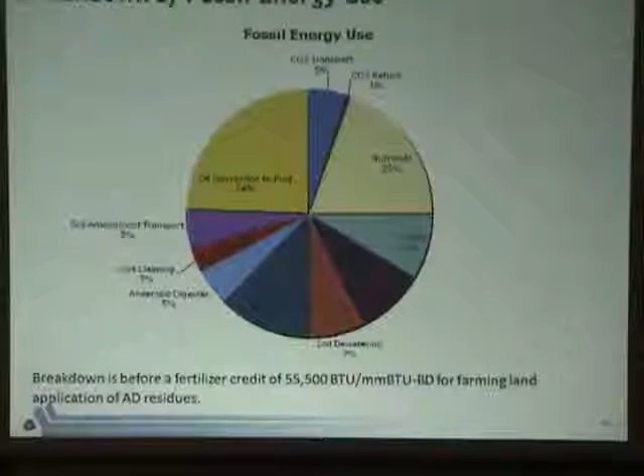I would agree, depending upon how far you succeed in your nutrient recovery. That's a key question. But the other thing you'll have to feed into that, though, is regardless of your ability to recover, you still have to consider the number of waste treatment plants, the location, and land nearby to grow in. But I would agree with regard to the N and P. It depends on how you do it.

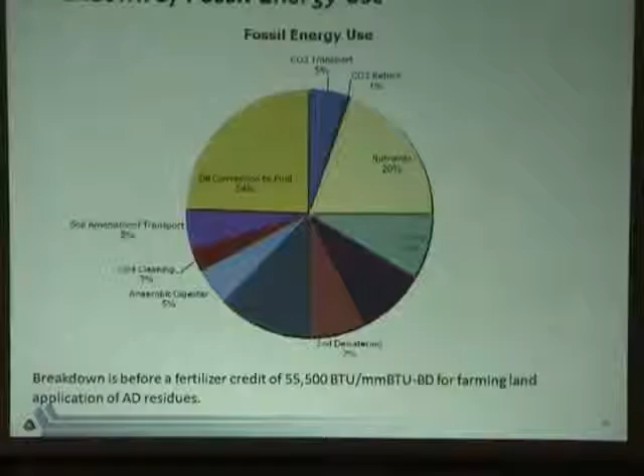And the other thing is you mentioned using liquefaction as a replacement for anaerobic digestion in your model. As a replacement for the entire conversion step. For the entire conversion step. Yes. Okay, so it would potentially address the 24% here that goes to transesterification. It would affect, I think, a number of things. It would affect this step. It would affect the way that you do dewatering. It would remove this step. I have to think hard about that one. And this is still based on 25% of the content? For this analysis, this is all based on the 25%. 25% and 25 grams per square meter production. Correct.

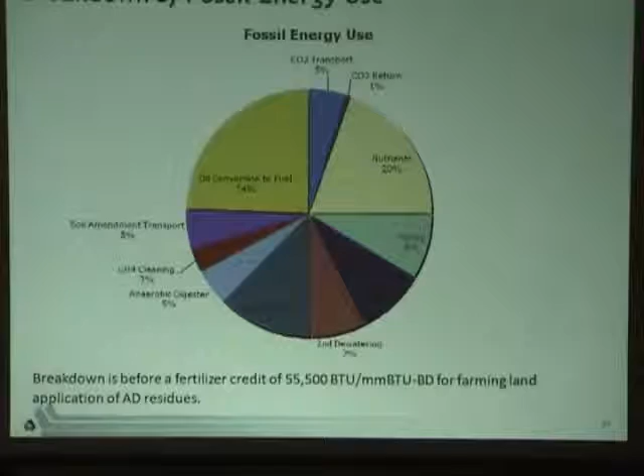So we chose those. Those parameters are largely a matter of choice. You see such a broad range, and it's going to depend upon the species, it's going to depend upon where you're growing. So we chose what seemed to be sort of a conservative value, and then used a sensitivity analysis to see how much it would change.

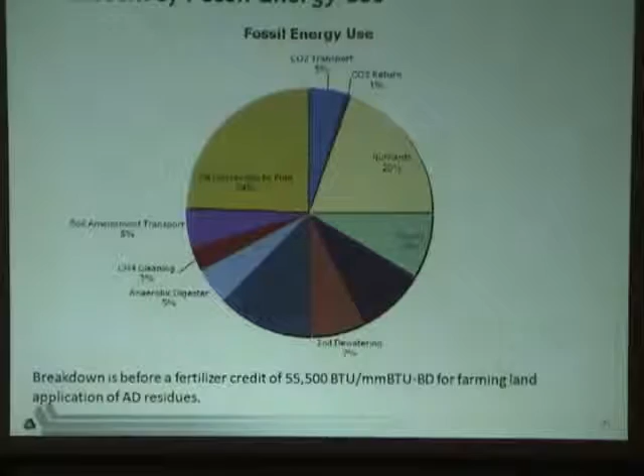One thing that seems to be emerging in the discussions I've heard is that there's a sense that it will be easier to increase the lipid fraction than to increase the productivity. And that was the motivation in the reduced emission scenario in A, that I increased the lipid fraction but didn't change the productivity. So that's how we explored that space.

So, go ahead. Am I correct in assuming that the raceway ponds are limited to climates south of here? I would say so. People are exploring other algae that can be used. Of course, by the time you get to the point that the water freezes, you're done. I think warmer climates are explored.

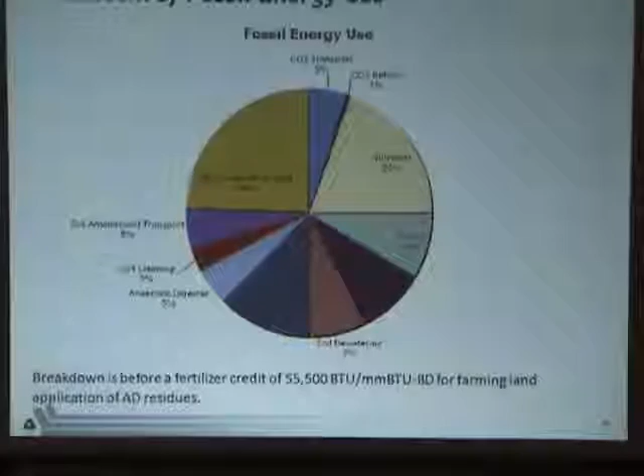Lance? I was just going to say on the wastewater one, if the wastewater plant was actually forced to remove nitrogen, they would spend energy and have greenhouse gas emissions associated with that. In that situation, would you consider a negative, essentially a credit for the nutrients, if you use wastewater nutrients? I think that would be fair.

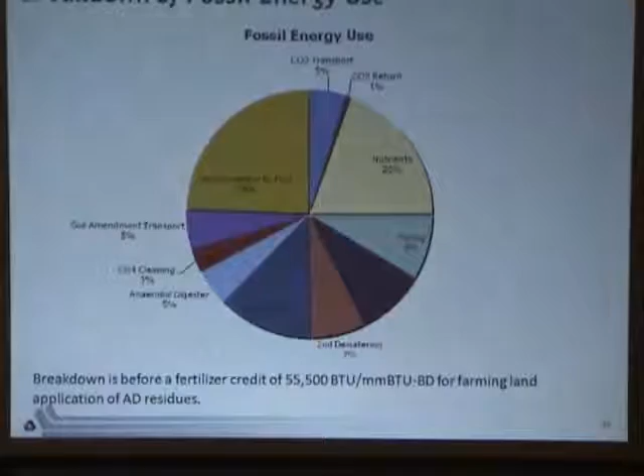I think the key question is you're comparing A with B, and you want to make sure that the two scenarios are consistent. So if the thought in the scenario is that by introducing this we obtain a way to, let's say, effectively reduce our production of ammonia, that would be a fair displacement credit. These are the sorts of things that LCA analysts just argue a great deal.

And it makes a good point because it points out the importance to consider the economic consequences. You shift the markets around you, and you have to consider that effect.

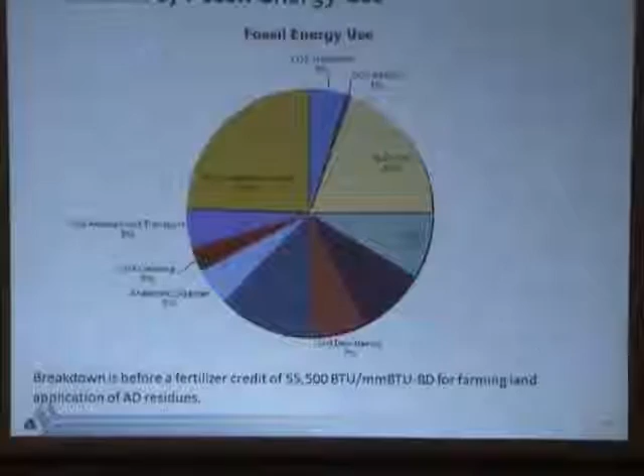As a result of the second dewatering, we got the solid concentration about 200 grams per liter. How is that number decided? So that number comes from basically performance of the centrifuge. So you get sort of 8 to 10% out of dissolved air flotation, and that determined the volume that was then brought into, I think we used a disk stack centrifuge, using energy consumption there.

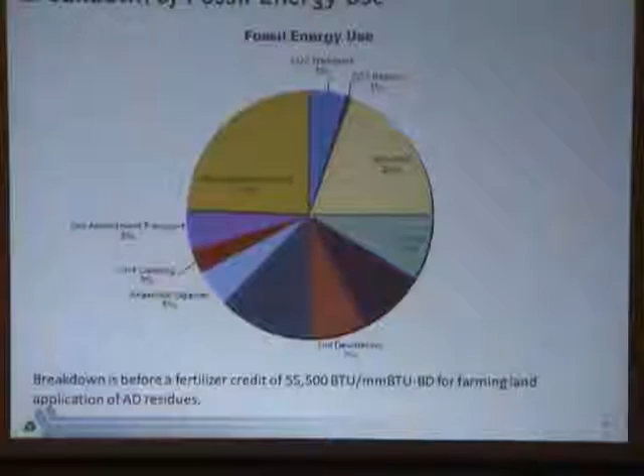So the strategy there was to just keep getting rid of as much water as we could with the less energy intense processes. But then to get to that drier level required that centrifuge. Basically, it's kind of optimization. Not that we've done the optimization.

One last question. How about the land requirements? Yes, you're not going to be using agricultural land, but city land to produce ponds or whatever technology it is. Where are the lands and how much land is available? How much can be produced by that? So there would be two parts to the answer to the question.

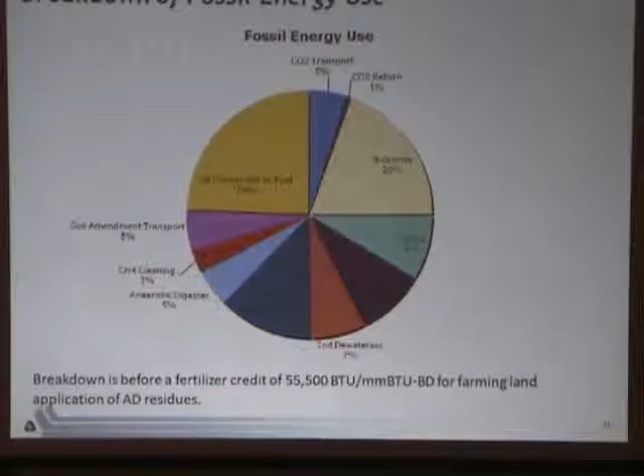One is on the life cycle analysis side, the importance of the land would be to include land use change in the algae life cycle analysis, as is done, for example, with corn ethanol. And in that case, we've not included it yet, partly with the intuition that the productivities for algae per acre are so much higher than the other biofuels that we think that it will be a very small effect. We'll come back and revisit it later.

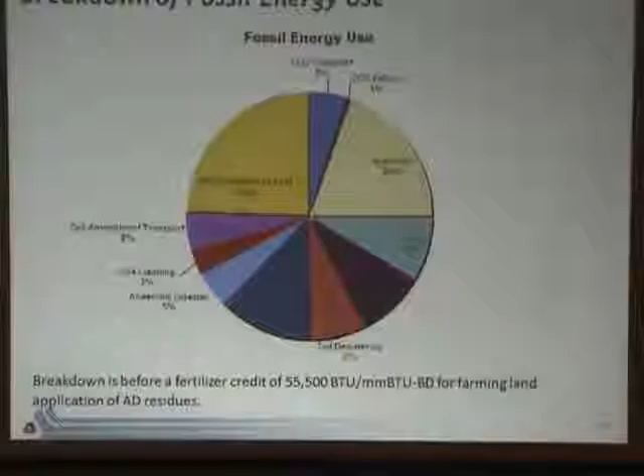The second half of the question is more along the lines of resource assessment to determine potential for producing algal fuels. And the feedback there to life cycle analysis is the location of the land is going to determine the species that you can produce, your productivity, and so that would affect the life cycle analysis. We have not done a site-level life cycle analysis yet.

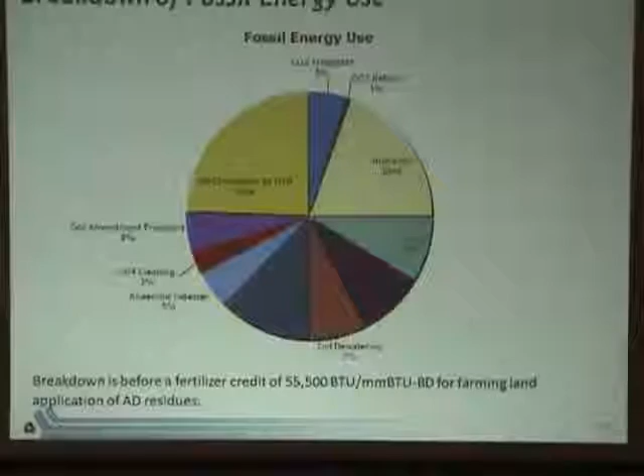I mentioned the harmonization work, and one of the things I hope we might be able to do is to start making use of the work done by Pacific Northwest National Lab and some of the other people that are doing the resource assessment in order to do those sorts of studies. But if you're interested in that question, take a look at the report from PNNL. I forget the lead author's name, but certainly Wigmosta was one of the authors on there.

And they've gone through using GIS data to identify places with suitable slopes, suitable weather conditions. They've identified the pan evaporation and so forth, and used that to assess potential for algae. And in that same report, to assess water consumption.